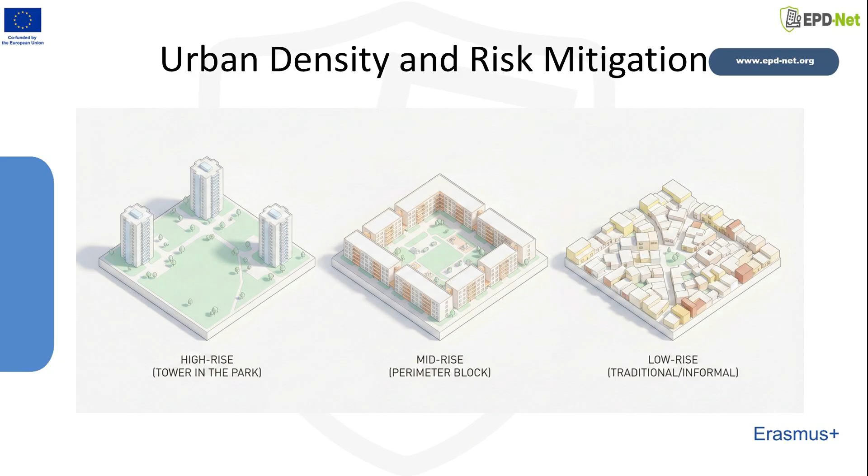Students will also explore the social dimensions of density, including vulnerability, service accessibility, and community resilience. Overall, the lecture aims to demonstrate that urban density is not only a source of risk, but can be intentionally shaped as a tool to support safer, more resilient, and more sustainable urban development.

Density refers to the concentration of physical or social elements, such as people, buildings, or activities, within a specific geographic area. Urban density is a more complex, multi-layered concept that reflects how built form, population, land use, and infrastructure overlap in cities. Urban density describes how people, buildings, and land uses are concentrated in a city, shaping spatial patterns, infrastructure performance, and environmental conditions.

Compactness refers to the spatial efficiency and closeness of urban development, including building proximity, reduced sprawl, and mixed-use form. Compactness is the degree to which urban development is spatially concentrated, minimizing sprawl while maximizing proximity and efficiency. Exposure refers to the presence of people, buildings, infrastructure, and economic activities in areas that may be affected by hazards.

Vulnerability is the sensitivity or susceptibility of people or systems to damage during a hazardous event. It includes physical, social, economic, and infrastructural dimensions. Risk is the likelihood of harmful consequences resulting from the interaction of hazards with exposed and vulnerable urban elements. Risk mitigation is the process of reducing hazard impacts by lowering exposure and vulnerability through planning, design, and policy measures.

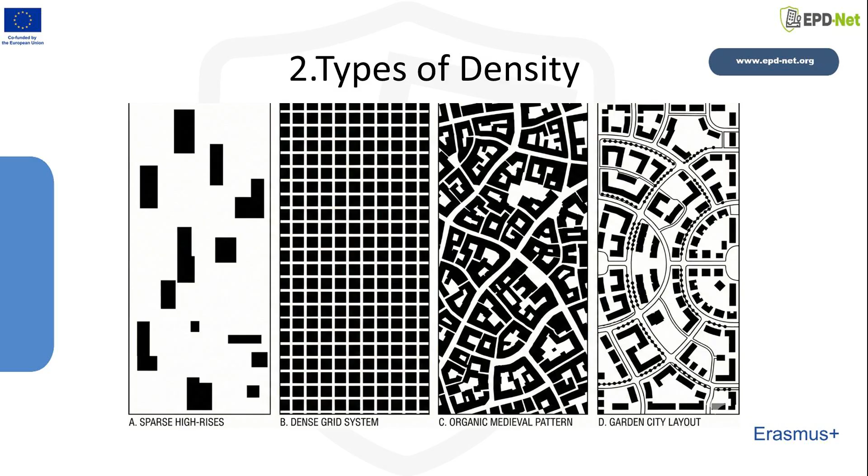Urban density can take different forms depending on how buildings, land uses, and people are arranged in space. Understanding these typologies helps us analyze how density affects mobility, exposure, resilience, and overall urban performance. In this section, we examine the main forms of density found in cities around the world.

Horizontal and vertical density describe two different ways that cities become compact. Horizontal density develops when buildings spread out across a large area but remain relatively low rise. This pattern often produces continuous built fabric with limited open space. Streets tend to be narrow, and land coverage is high. Although movement distances remain short, horizontal density can reduce ventilation, increase heat accumulation, and create challenges for emergency access.

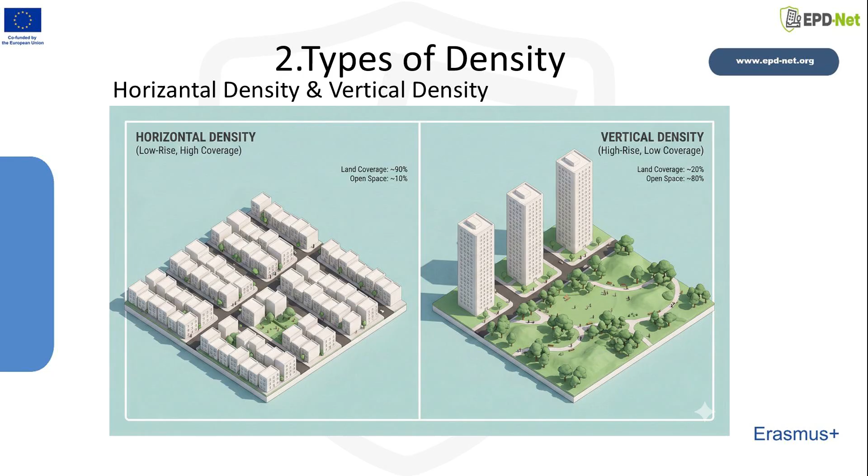Vertical density concentrates development upward through multi-story or high-rise buildings. This form allows more open space at ground level and can support transit-oriented development. At the same time, it introduces new challenges such as pressure on elevators, vertical evacuation difficulties, and greater reliance on structural safety during hazards like earthquakes. In practice, most cities combine both forms, but the balance between them significantly shapes resilience, energy performance, and livability.

Mixed-use compact development brings residential, commercial, institutional, and recreational functions together within a walkable area. By placing daily activities close to each other, this model reduces travel distances, supports public transportation, and creates vibrant street life. From a resilience perspective, mixed-use density offers several advantages.

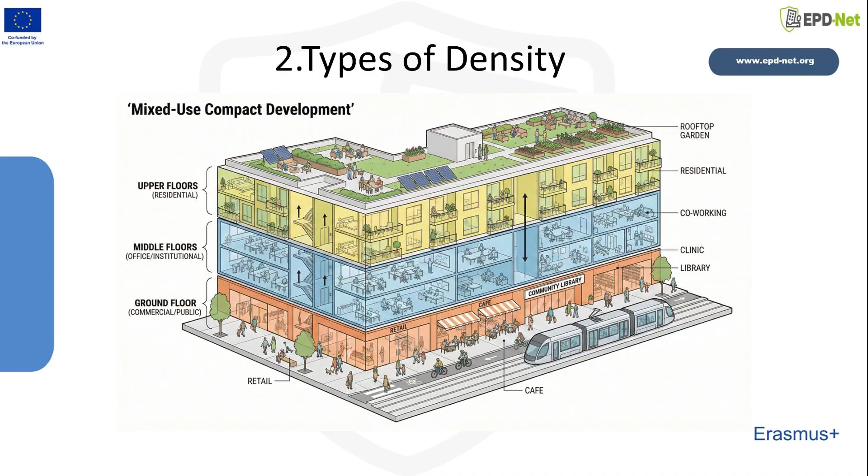It distributes activity throughout the day, creating natural surveillance and social cohesion. It reduces dependence on long-distance mobility, which can fail during emergencies. It supports multifunctional infrastructure, such as shared public spaces and integrated green networks. However, if mixed-use areas lack adequate open space or evacuation routes, the concentration of people can produce severe congestion during crises. Therefore, successful mixed-use environments require careful planning of mobility corridors, open spaces, and building codes.

Informal settlements represent one of the most intense forms of unplanned density. They typically develop without formal regulations, infrastructure, or hazard-sensitive planning. Buildings are often constructed incrementally, using locally available materials, and streets evolve organically rather than through a planned network.

As a result, these areas may experience extremely high person-per-hectare ratios, limited emergency access, narrow, irregular street patterns, aging or substandard structures, insufficient sanitation, drainage, and open space, and high exposure to floods, landslides, fires, and seismic risk. Despite these challenges, informal settlements also demonstrate strong community ties and adaptive capacities. Understanding these dynamics is essential for upgrading programs and resilience-oriented interventions.

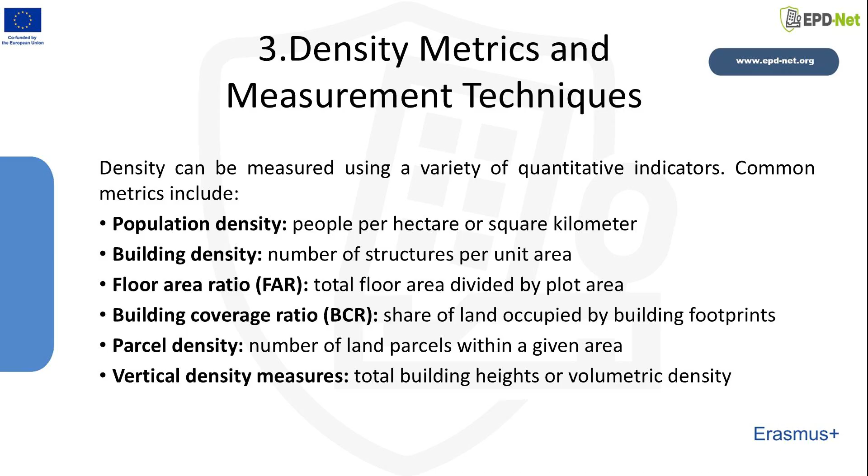Density can be measured using a variety of quantitative indicators. Common metrics include population density, people per hectare or square kilometer; building density, number of structures per unit area; floor area ratio, FAR, total floor area divided by plot area; building coverage ratio, BCR, share of land occupied by building footprints; parcel density, number of land parcels within a given area; vertical density measures, total building heights or volumetric density.

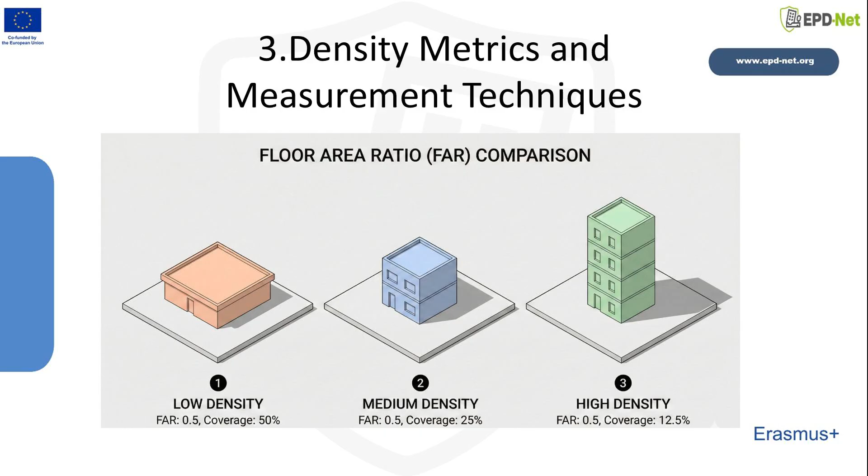Contemporary studies frequently use GIS, geographic information systems, and remote sensing to measure density patterns across large areas. GIS enables mapping of building footprints, land use, street networks, and hazard zones. Remote sensing provides satellite-derived data on impervious surfaces, vegetation cover, and thermal characteristics. These tools allow planners to identify density hotspots, evaluate ecological impacts such as heat islands, analyze evacuation networks, combine density metrics with vulnerability indicators, and support evidence-based risk mitigation strategies.

Urban planning plays a central role in reducing the risks that emerge in high-density environments. As cities grow, planners must find ways to create compact, efficient, and sustainable urban forms while also ensuring safety, accessibility, and resilience. This section focuses on key planning strategies that help cities manage hazards and protect communities.

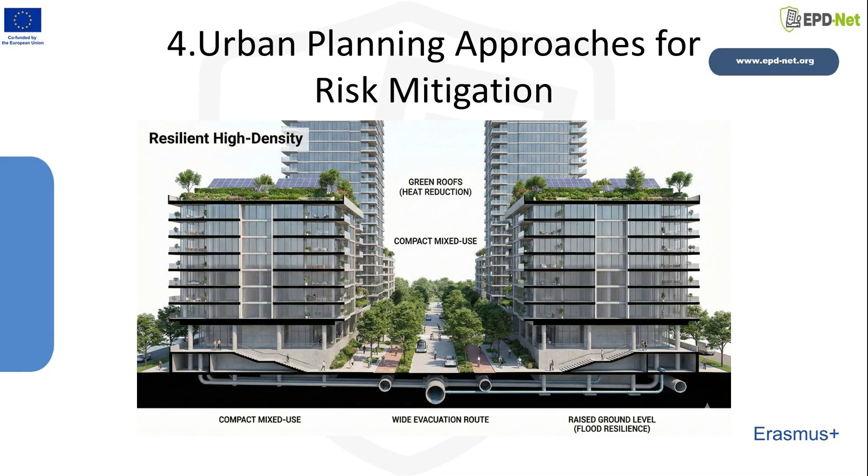When we talk about urban compactness, we usually think of efficiency, shorter travel distances, more walkable streets, and better use of land and public transport. However, compactness also brings challenges. If it is not managed carefully, dense urban forms can increase exposure to hazards, overload infrastructure, and reduce emergency accessibility. So, the key question is, how can we design cities that are compact, but also safe and resilient?

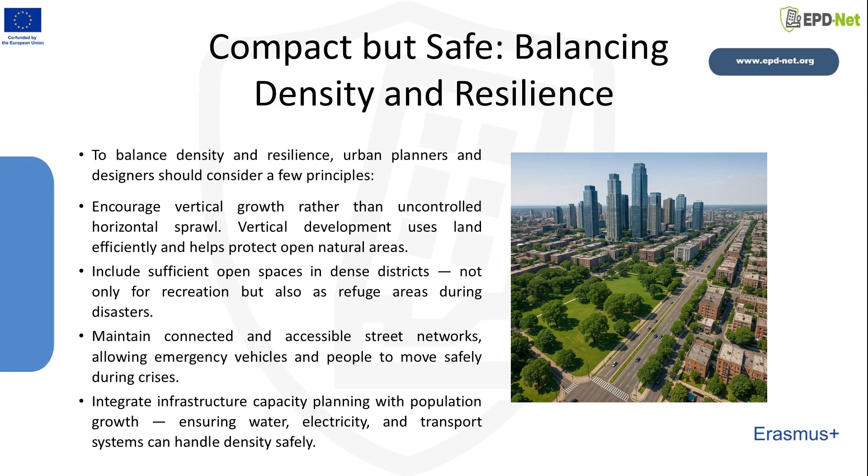Let's think of compactness as a tool. When used wisely, it supports sustainability and livability. But without proper planning, it can become a source of risk. For instance, very tight street networks can delay evacuation during earthquakes or floods, while a lack of open spaces can limit emergency shelter areas. To balance density and resilience, urban planners and designers should consider a few principles.

Encourage vertical growth rather than uncontrolled horizontal sprawl. Vertical development uses land efficiently and helps protect open natural areas. Include sufficient open spaces in dense districts, not only for recreation but also as refuge areas during disasters. Maintain connected and accessible street networks, allowing emergency vehicles and people to move safely during crises. Integrate infrastructure capacity planning with population growth, ensuring water, electricity, and transport systems can handle density safely.

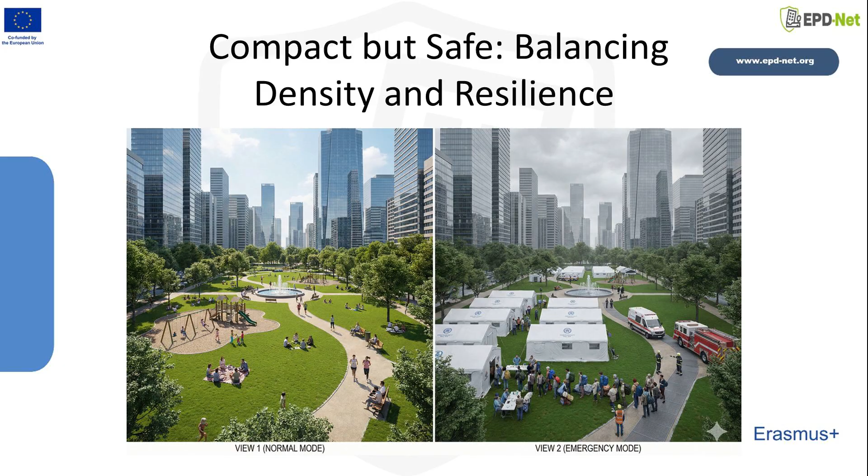The goal is not to avoid density, but to shape it intelligently, so that compact urban areas remain safe, adaptable, and resilient under hazard conditions. A well-planned compact city should balance high efficiency with strong protection for its residents and systems.

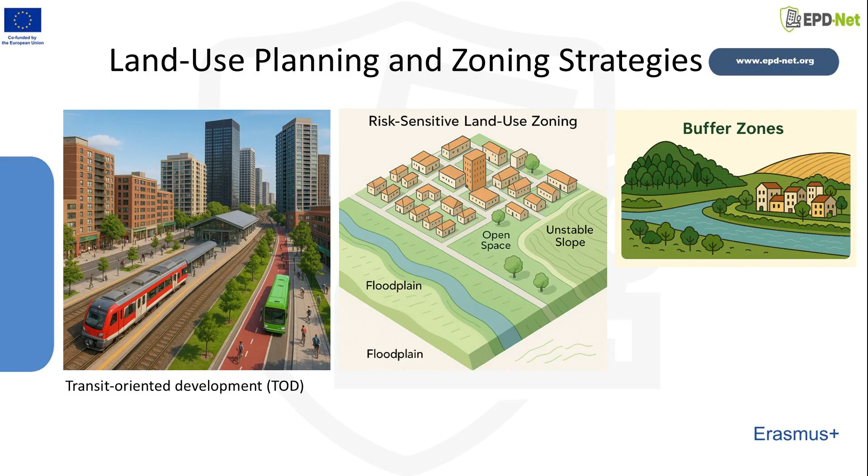Land use planning and zoning are key tools for managing urban growth and reducing disaster risk. Land use planning defines where different activities such as housing, industry, and open spaces should be located, while zoning regulates how land can be used, including building density and height. When combined with hazard data, these tools help cities grow in a safer and more sustainable way.

Risk-sensitive zoning avoids dense development in high-risk areas. Mixed-use zoning supports accessibility while maintaining safety. Buffer zones reduce exposure to natural hazards, and transit-oriented development concentrates density in well-connected and safer locations. Overall, effective zoning aligns land use with local risk conditions, protecting vulnerable functions and strengthening long-term urban resilience.

Public spaces and street networks are essential components of resilience. They act not only as social and recreational areas but also as critical safety infrastructure during emergencies. Elements of a resilient public space network include connected open spaces: parks, plazas, and wide boulevards that can serve as evacuation or assembly areas. Clear evacuation routes.

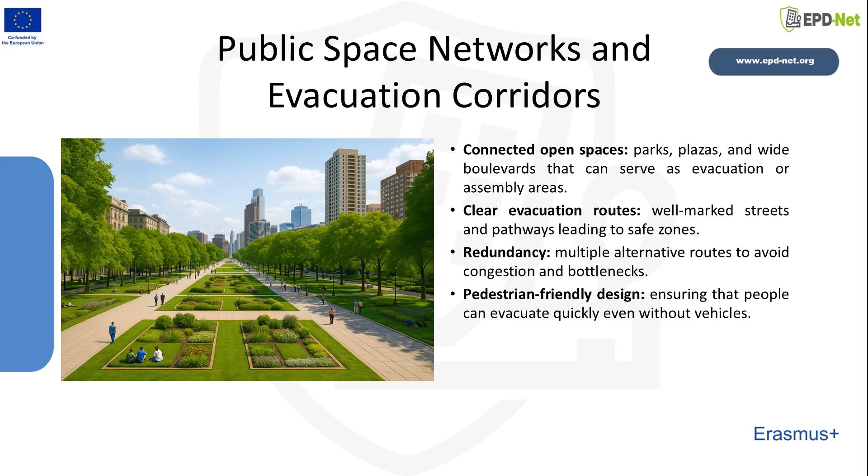Well-marked streets and pathways leading to safe zones. Redundancy: multiple alternative routes to avoid congestion and bottlenecks. Pedestrian-friendly design, ensuring that people can evacuate quickly even without vehicles. In dense districts, these networks are especially important because they compensate for limited private open space and high crowding.

Green infrastructure plays a dual role in dense cities by enhancing environmental quality and reducing hazard impacts. Nature-based solutions help cities manage heat, water, and environmental stress more effectively.

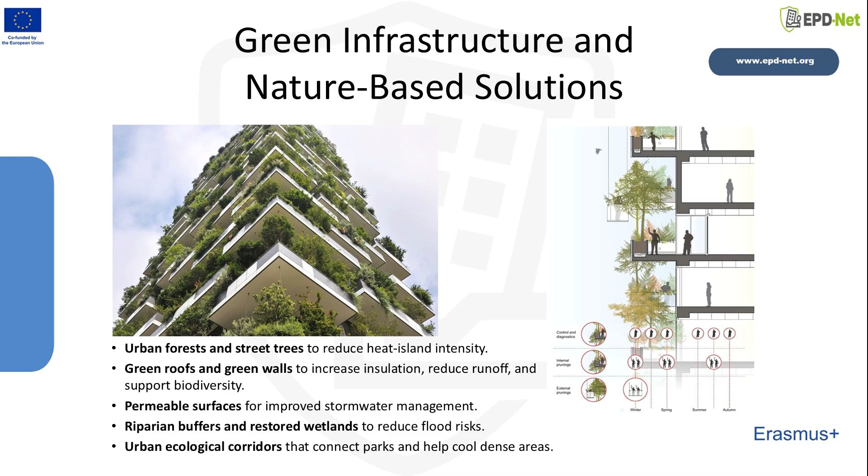Key applications include urban forests and street trees to reduce heat island intensity; green roofs and green walls to increase insulation, reduce runoff, and support biodiversity; permeable surfaces for improved stormwater management; riparian buffers and restored wetlands to reduce flood risks; urban ecological corridors that connect parks and help cool dense areas. By integrating nature into the urban fabric, planners create healthier, more adaptable, and more climate-resilient environments.

Building performance is a critical dimension of urban resilience. Strong building codes ensure that new construction can withstand earthquakes, floods, storms, and fires. However, many dense areas contain older structures that were built before modern standards, making retrofitting essential.

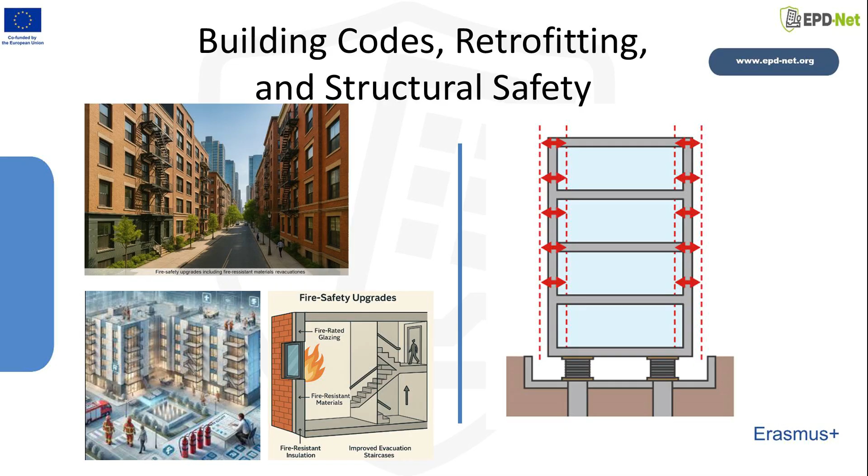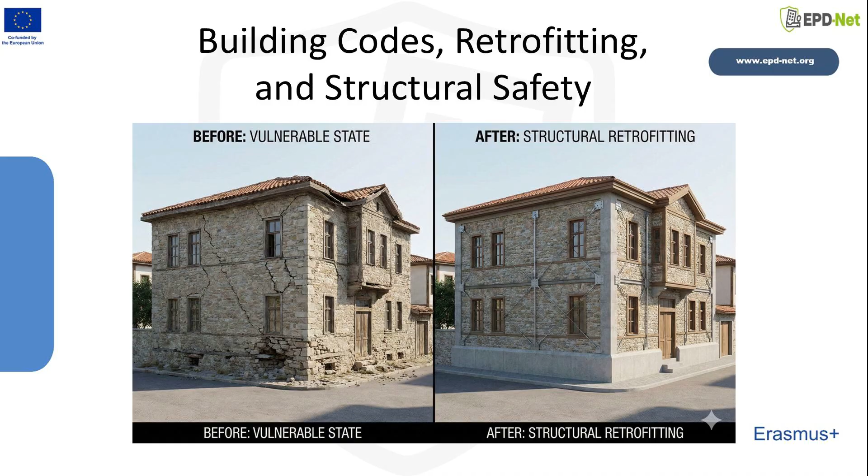Risk-reducing measures include enforcing updated building codes for all new development, seismic retrofitting of older or unreinforced masonry buildings, strengthening critical facilities such as hospitals, schools, and emergency centers. Fire safety upgrades including fire-resistant materials and improved evacuation staircases. Infrastructure modernization such as improved drainage or reinforced foundations. Investing in structural safety is one of the most effective long-term strategies for reducing casualties and damage during disasters.

Urban density is not only a physical condition, it also shapes how communities experience, respond to, and recover from disasters. Social inequalities, service accessibility, and community cohesion strongly influence vulnerability and resilience in dense environments. Socioeconomic vulnerability. Dense cities often contain sharp social and economic contrasts.

Certain groups face higher risk because of low income and limited savings, overcrowded or insecure housing, poor access to services, healthcare, education, transport, higher dependency ratios, informal or unstable employment. These factors reduce people's ability to prepare, evacuate, or recover after a hazard, making vulnerability analysis essential for risk planning.

Community resilience and social capital. Community resilience refers to the ability of residents to support one another during crises. Dense areas can strengthen resilience if social networks are strong. Public spaces support interaction. Trust and cooperation exist within the neighborhood. However, in areas with social tension or weak services, social capital may erode. Inclusive spaces and community participation help build stronger resilience.

Migration, poverty, and informal settlements. Many dense districts grow through internal or international migration. Migrants often settle in informal or low-income areas where risks are higher. Key challenges include limited legal and service access, irregular street layouts, overcrowded housing, location in hazard-prone zones, slopes, floodplains.

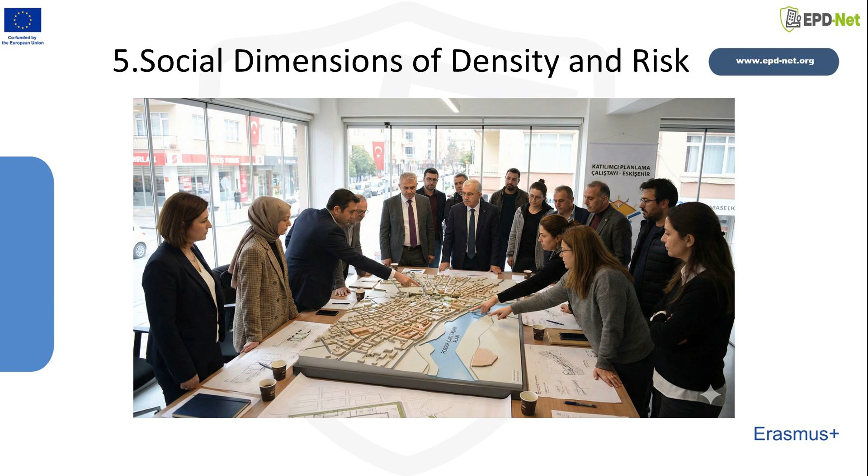Understanding risk in dense urban environments requires reliable tools and analytical methods. These tools help planners, researchers, and decision-makers evaluate hazards, identify vulnerable populations, and design effective mitigation strategies. In this section, we review key analytical approaches used in contemporary urban resilience studies.

Spatial analysis, GIS, remote sensing, multi-hazard mapping. Spatial analysis allows us to examine how risk varies across different locations in a city. GIS, Geographic Information Systems, is one of the most widely used tools. It helps map buildings, population density, infrastructure networks, hazard zones, and environmental conditions. With GIS, we can visualize how risks overlap, for example, where high-density districts coincide with floodplains or seismic faults.

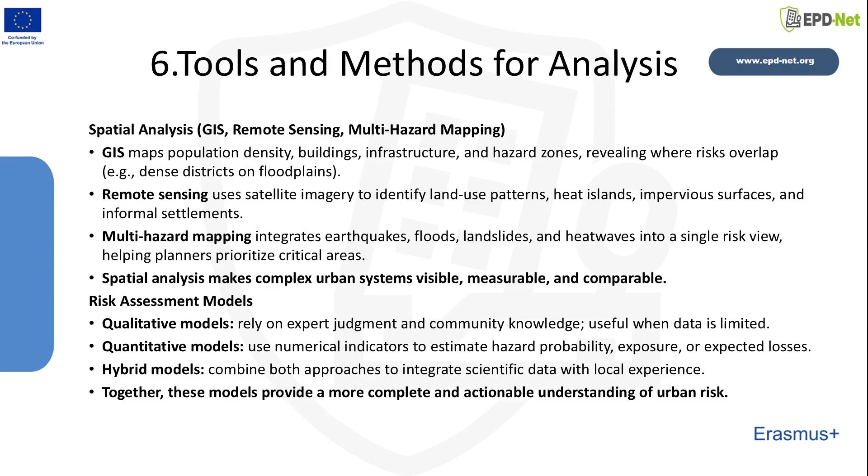Remote sensing provides satellite or aerial imagery that can detect land use patterns, vegetation cover, surface temperature, and impervious surfaces. This is useful for identifying heat islands, flood-prone areas, or informal settlements. Multi-hazard mapping combines several hazard layers, such as earthquakes, floods, landslides, and heatwaves, to show cumulative risk. This helps cities prioritize areas that require urgent attention. Overall, spatial analysis makes complex urban systems visible and measurable.

Risk assessment models: qualitative, quantitative, hybrid. Risk assessment models help translate raw data into meaningful risk levels. Qualitative models use descriptive categories, expert judgment, and community knowledge. They are helpful when data is limited or when understanding perceptions and behaviors is essential. Quantitative models use numerical indicators and statistical methods. For example, they may calculate hazard probability, population exposure, building fragility, or economic losses.

Hybrid models combine both qualitative and quantitative elements. They are widely used in urban resilience because they integrate technical data with local expertise. Together, these models support a more holistic understanding of risk and guide targeted mitigation actions.

Scenario planning and predictive modeling help cities understand how future events and decisions may influence risk. By exploring multiple plausible scenarios rather than a single forecast, these tools support long-term planning in dense urban environments, where small changes can have significant impacts.

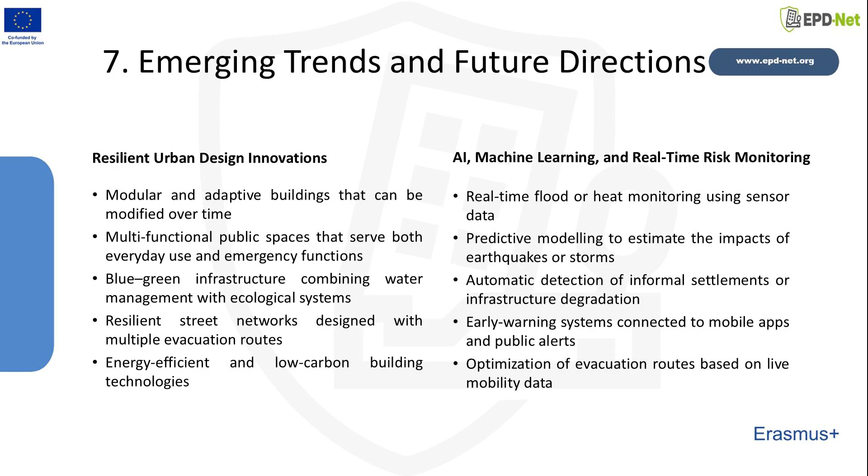Current innovations include modular and adaptive buildings that can be modified over time, multifunctional public spaces that serve both everyday use and emergency functions, blue-green infrastructure combining water management with ecological systems, resilient street networks designed with multiple evacuation routes, and energy-efficient and low-carbon building technologies. These innovations aim to create urban environments that can withstand shocks, recover quickly, and continue functioning under changing conditions.

4. AI, machine learning, and real-time risk monitoring. Digital technologies are transforming how cities assess and manage risk. AI and machine learning enable the analysis of large and complex datasets, such as satellite imagery, sensor networks, mobility patterns, and climate forecasts.

Applications include real-time flood or heat monitoring using sensor data, predictive modeling to estimate the impacts of earthquakes or storms, automatic detection of informal settlements or infrastructure degradation, early warning systems connected to mobile apps and public alerts, and optimization of evacuation routes based on live mobility data. These technologies allow decision-makers to act quickly and accurately, improving the overall safety of dense urban areas.

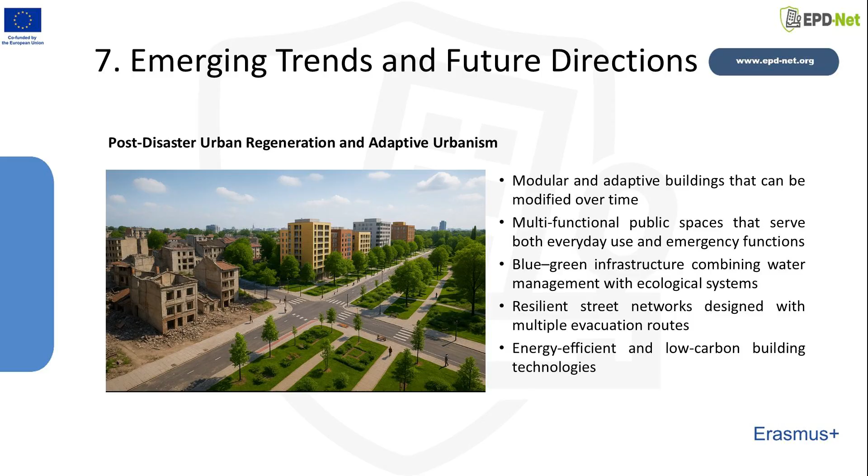5. Post-disaster urban regeneration and adaptive urbanism. After a disaster, cities face the challenge of rebuilding in a way that reduces future risk. This is known as post-disaster urban regeneration, and it emphasizes build back better principles. Adaptive urbanism goes a step further, encouraging cities to evolve continuously based on new knowledge, changing demographics, and environmental conditions.

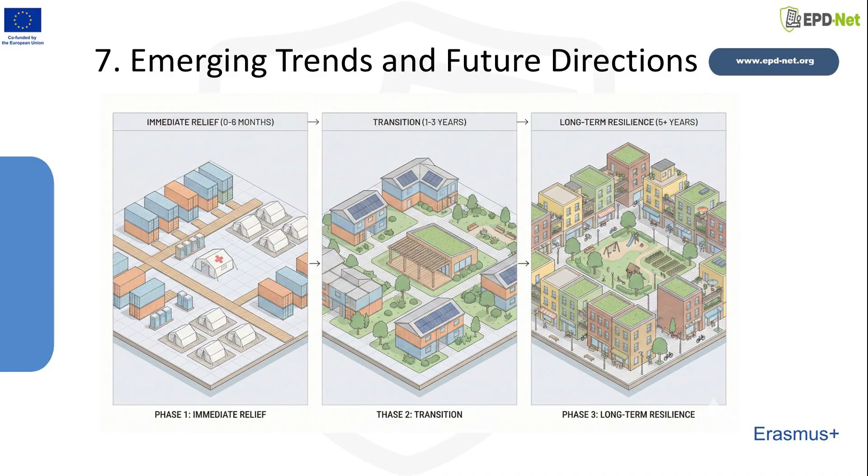Key principles include rebuilding with stronger building codes, redesigning street networks to improve evacuation, restoring ecosystems and natural buffers, providing safer housing for displaced populations, engaging communities in planning and decision-making, and promoting flexibility so the city can adapt to future uncertainties. Together, regeneration and adaptive urbanism enable cities not only to recover but also to emerge more resilient than before.